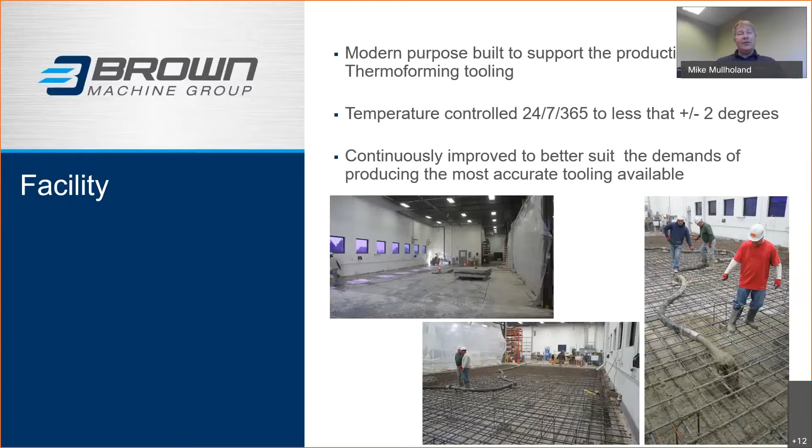And once they start to realize the benefits of us and our methodologies, our equipment, our facility, and the time we take and attention to detail, they start to get the benefit out of that tooling, and we see them after that being a constant customer with us and sending us all their trim tools. So it definitely makes a difference in the industry we're in, and we're going to continue that investment, and we'll talk about that a little bit later in the presentation with some equipment that we have coming.

Let's talk about our sales process next. So something we believe we do quite different than everyone else. We don't have, if you will, salespeople. We have project engineers. So the bulk of the people in that department either came out of our engineering group, our manufacturing group, or our processing group in terms of running equipment and things like that. So they all have a lot of knowledge that they bring to the table when customers send in a product for us to quote.

We're not just checking boxes and saying, okay, it's a stripper plate, it's a clamp plate, we'll send it in. We're looking at that product design and trying to understand what's going to be difficult to form, what's going to cause our customers headaches, what may be issues with that tooling that are going to be problematic down the road for them, bad punch to die conditions, stripping issues, things like this, or maybe even things that are going to drive the cost of the tooling up.

And we have those conversations up front at the time of quoting where we can kind of help guide customers into a better product design that's more manufacturable, it's easier to hold tolerances on the part in regard to things that may not make that difference in terms of the part itself. It can help reduce the cost of the tooling, or once again, make it easier to support, make it easier to manufacture because of what we can suggest along the way.

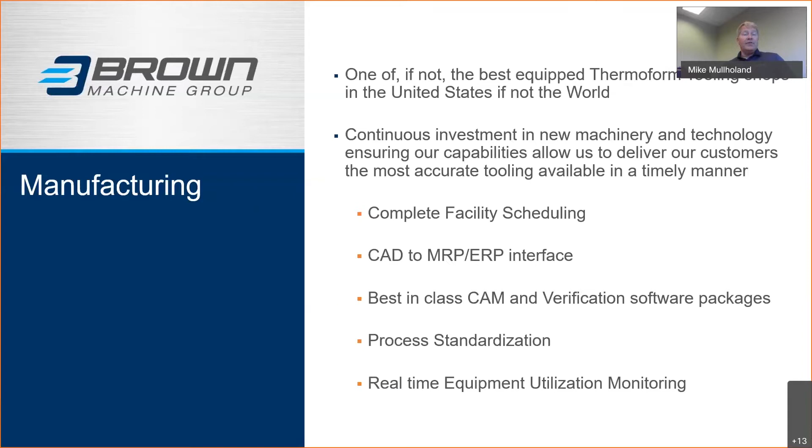All the vent drill holes are put in the machine, not by hand. We have control in making sure that those vent drills are there, they broke through, not missing. We don't have a broken drill bit somewhere. We laser check that drill when it's done for length or breakage. So if it would break, the machine will stop, pass that part out of it, flag that part. We know right where to look to understand where the issues might be. So once again, it improves quality, consistent quality, and accuracy of the parts, and not a lot of hand finishing.

The other thing it does, being able to 5-axis these parts on the back side, is the cooling circuit and the water and whatnot in them. We're able to push that water up very close to the cavity surface, up the sidewalls, up the top where you have a lot of material thickness also, and get the heat out of those parts very evenly and with a lot of water in cavities and things like that. So again, reduces cycle times, makes the tooling more efficient.

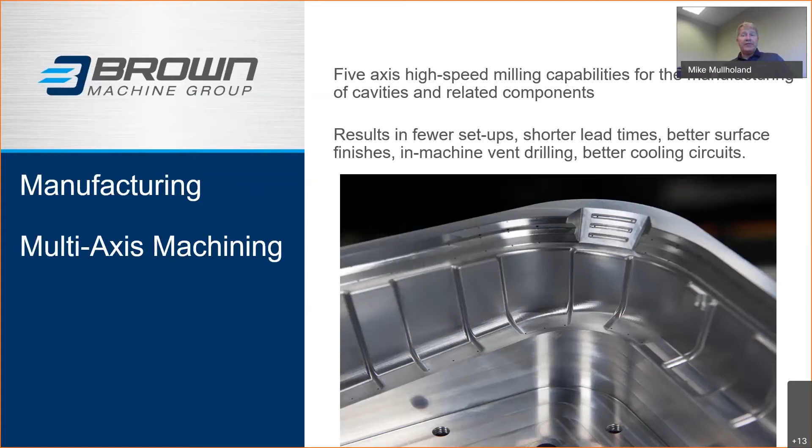Talk a little bit about automation. So we've got a lot of pallet changers, we've got FANUC robots, linear robots, a lot of things to use throughout the facility to automate processes, let us run lights out, make use of this equipment that we've bought, and as well not having a man stand there and just push buttons and watch for something to happen. We very often will have people running a multitude of machines where they're staying ahead of it, loading the pallet changer, loading the robot magazine and whatnot, and then they're on to running another machine.

Once again, keeps us cost competitive. Even though we have the best equipment out there, we run it, we get high utilization out of it. That keeps our costs under control, and as well allows us to deploy a lot of standardization in terms of the pallets, the mounting in between different machines and whatnot. It's driven that so that if one machine would be down, we can very easily move the pallet to another machine, pick it up and run it over there.

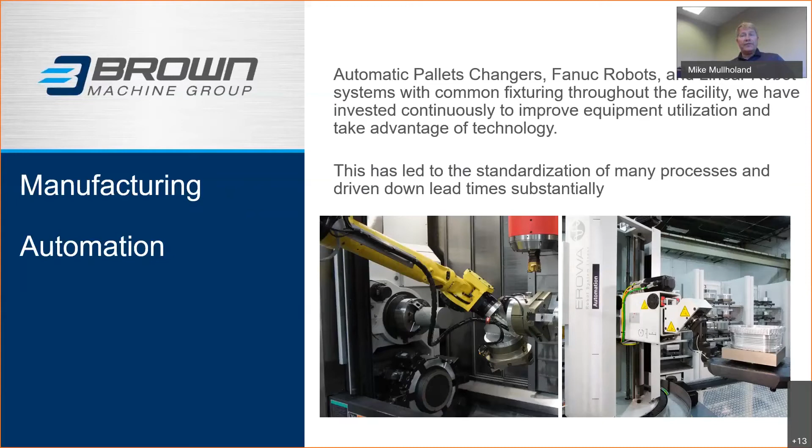Again, another picture of that robot. So once again, that robot would use that mainly for round componentry. So you take a cup cavity, for instance, and you take the round piece of billet. The robot would load that into that machine in the main spindle. The machine would mill, drill, tap, turn on the bottom of the cavity, let's say, transfer it to a sub spindle. The robot would put another piece in the main while that work was going on again in the main spindle.

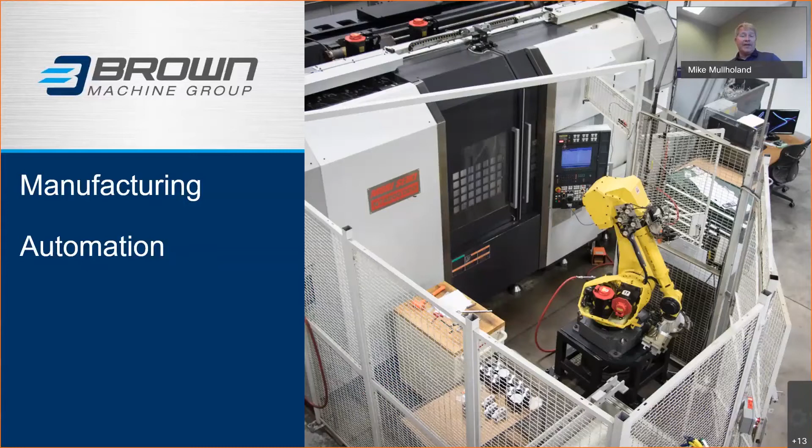In the sub spindle, that machine's also going to be cutting the cavitation, doing the vent drilling, doing any engraving. And the next time that robot interacts with the machine, it's going to take a completed part out, put it in the drawer untouched by a person. And we've essentially machined, if it was round, inside, outside, top, bottom. If it was non-round, we've done all 6 sides without a person even touching it.

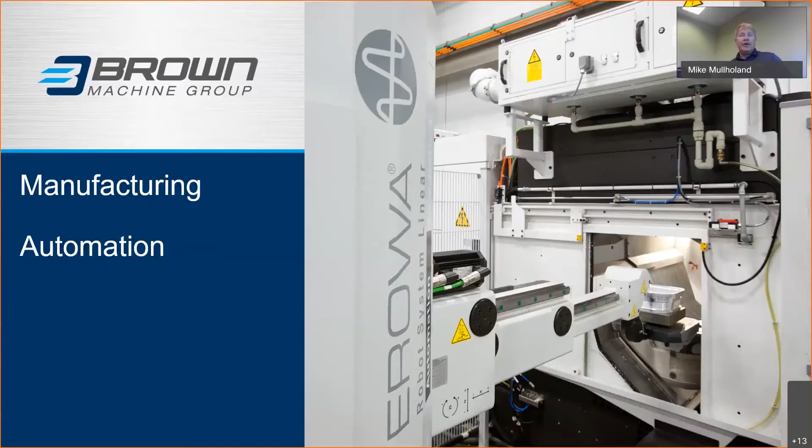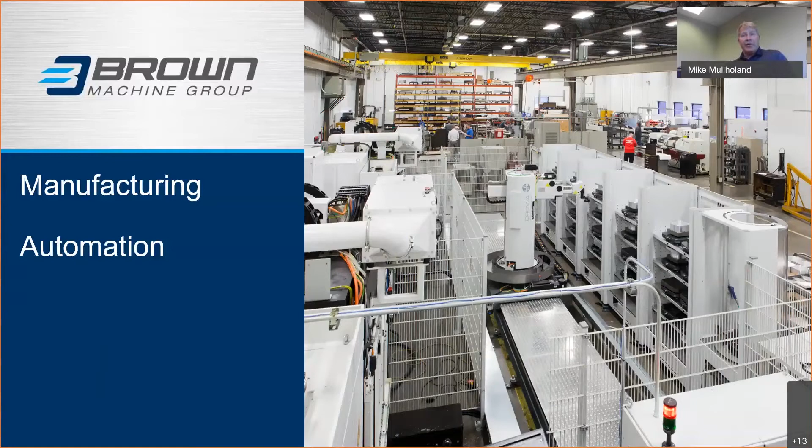Again, another picture of our linear robot loading up one of the milling machines. A wider view of that, so we have a 40 station stock station there, and in that we can have round parts, non-round parts, job A, B, C, D. Doesn't really matter, and we can run things out of sequence. We can run one to test things. If a customer wanted to get, let's just say, a cavity ahead of all the rest of them, that's not a problem. There's no additional charge for that because we've, again, designed around a lot of standardization.

It doesn't make any difference to that machine or the robot whether it takes, let's just say, a rectangular cavity out and runs it first. And before running the other 20 of them, it runs an egg-shaped cavity. So we can run one egg-shaped cavity, send it to a customer, or internally pull samples off of it, do some testing while we're in the midst of running other things.

So it gives us a lot of flexibility. Also gives our customers a lot of options in terms of if they want to see a part ahead of time or if we want to do just certain aspects of things before or after with no additional cost, once again, because of the standardization.

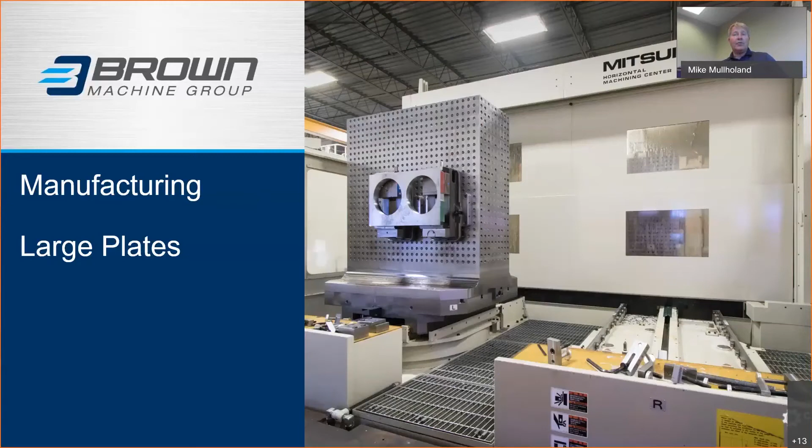Moving on from there, we'll go into some of the things that really set us apart. And that is our precision area, to which we have a jig grinder. So you see a picture of a very nice Hauser jig grinder, very specialized piece of equipment, very, very accurate, holds things down to 1/10,000th of an inch. So we fully contour, as you can see on the right-hand picture there, we would do dowel holes and trim contours for punches in this machine for the most part. So that machine, again, very, very accurate.

What that means to our customer is you'll see a lot of drawings come from other vendors, and tooling that we've repaired, reworked, redone, where they'll have a punch and die drawing that will just say maintain 2 to 4/10 punch to die clearance. If you've ever received anything from Brown, you'll see that the individual punch and die is toleranced with a specific size and a profile tolerance for the trim, as well as size and positional tolerance for the locating features, dowel holes, let's say. And the reason for that is we truly make those components to that print, to that accuracy level.

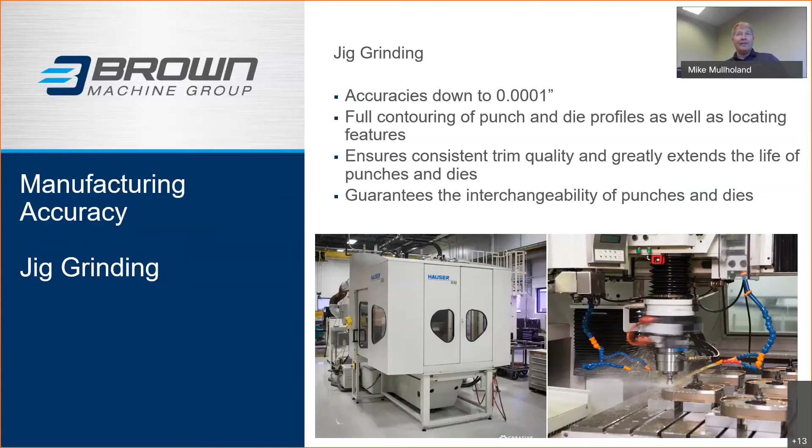Another machine that fits right into this same accuracy aspect is our jig borer. You're looking at a nice Yasda jig boring machine here. What we do on that machine is nothing but die shoes, die risers, mounting plates, things like that for the trim tool. So once again, a machine capable of tenth-type accuracies.

You can see the one die shoe pictured in the machine on the right. We're going to do any dowel hole locations, guide pin and bushing bores, or if there was punch to die round pilots and things like that. We're going to put those features in that die shoe after it's already been purchased, stress relieved, rough machined, allowed to sit again, stress relieved, and surface ground down to less than a thou, flat and parallel before it even enters into this machine.

But once again, this machine is going to make those locating and guiding features ultra accurate. So when we bolt those punches and dies that we made for you on top of them, the whole thing fits together, provides interchangeability, provides proper punch to die clearances, and gets you the absolute best conditions you can have for a good, long-lasting trim that holds its quality. And if you need to replace a part, you just take the old one off and bolt the other one on. We prove this day in and day out.

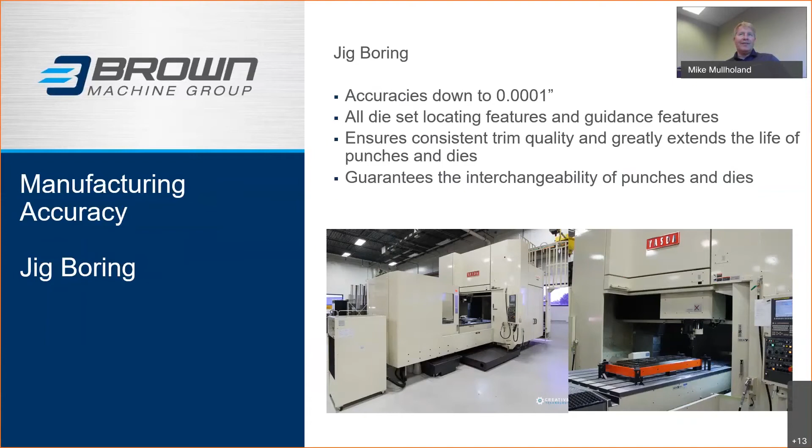The point I want to get across here is the attention we've given in terms of investment, methodologies, and equipment that we use to produce things to the accuracies we're talking about. When you see other competitors, they don't have machinery to this level, and they don't have a facility to this level. They're not producing parts at the same accuracies that we are. We've seen it, we can prove it. Anytime someone has parts or a die set, and says they're doing that, we welcome you to send it in. We're happy to CMM that and show you that it's not. And once again, that's usually the root of trimming problems and the longevity of the punches and dies.

I mentioned being able to check things like that, proof's in the pudding. We have two CMM machines that are sub-tenth accuracy capable. We can put full tools on them. There's some restrictions in terms of some of the sizes, but from a die set standpoint, we can fit full die sets on there, so we can check not only the shoes, but also punches and dies mounted on the shoes or separate. We can also check some mold components that don't exceed the limitations of the machine.

We can reverse engineer things here. Oftentimes customers get tool packages that they don't have prints with, and have us build a trim tool to go behind a mold that they have existing, or rework an existing trim tool when they don't have prints. We have the capability of reverse engineering and helping customers out with that process.

So the parts that run across this machine, anything we build that goes into the trim tool related to actual trimming - punch shoe, die shoe, scrap blades, punches, dies, pre-punches, pre-dies - all those components are 100% checked through our CMM equipment. We then have those inspection reports available to share with the customer and ship with the tooling, along with a 100% detailed as-built CAD package and print package for that tool.

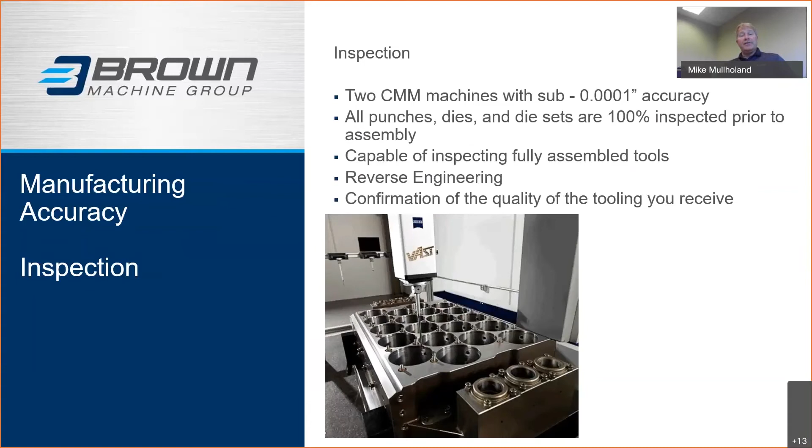If you have some plates or a tool that's much larger and have questions, and it won't fit in the CMM, sometimes we can pick it up with a couple different pickups and do it. Or we also have capabilities where we can put it in, say, our jig borer, and actually inspect things within that machine, which, as I reported here previously, is very, very accurate and has capabilities almost in terms of the accuracy of the CMM. So oftentimes, if we get pushed out of the CMM, we can check some things in the jig borer.

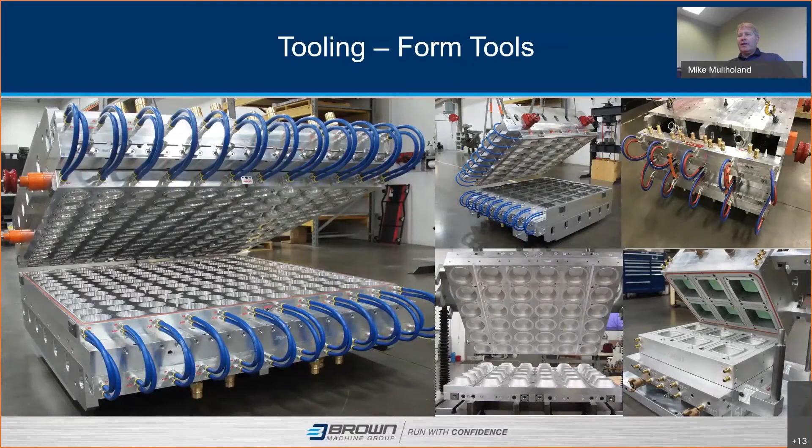Once again, mentioned tooling. So form tools - what we can do, as you see here, round tooling, non-round hinge containers, foam tooling. As I mentioned before, a lot of the European style, be it tilt molds, form trim in place, form trim stack. We're starting to get into form, fill, seal tooling. We do tooling for the paper industry - paper cups, paper plates, bowls, things like that. So we're really broadening our horizon, but again, all within this packaging industry.

We don't make parts for automotive. We don't make propellers. We don't make all kinds of other things. Our focus is on packaging tooling. That's what we've built the facility for. That's what we're experts for. That's what we bring to the table and make a difference in our customers' lives with - our ability to build packaging type tooling, mainly around thermoforming.

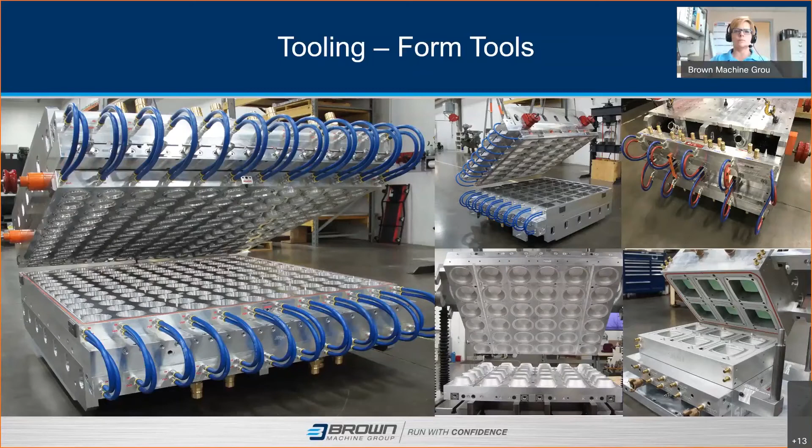So we've gotten quite a reputation in pre-punch tooling, be it for just piercing, be it for actually punching blanks, or we're also seeing a lot of this type of tooling coming into play for scoring and things like that, that will be used in tamper evidence. So we've built a pretty good reputation on that, and again, we stand behind everything we do.

So if there would be an issue, or if there are parts that, when we check things, if they're not to the tolerances, if they're not to the accuracy that they need to be, we will not ship something to you that's like that and just move it through. We will stop, we'll let you know, we'll remake those parts. Our reputation hangs on that limb right there, and we're going to make sure we get you something that's accurate that you're successful with. No arguments at all.

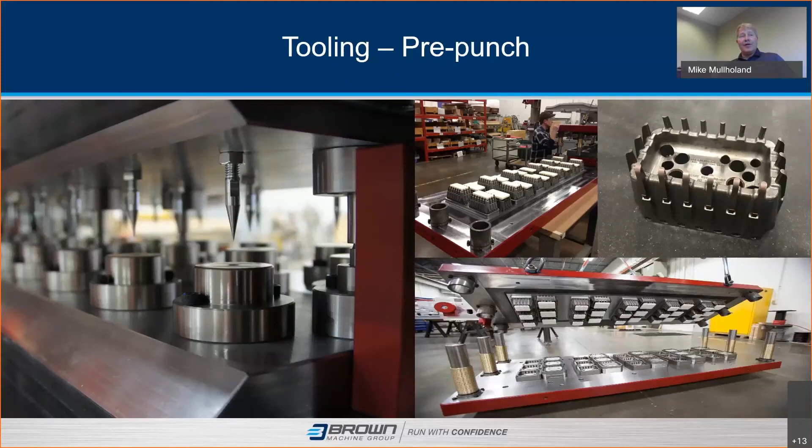Perimeter tooling - round, non-round cup tooling, bowl tooling, hinge container tooling, tamper evident hinge container tooling. We do it all. All these things require the same accuracies, the same tolerances that we live with day in and day out. We manage that with our jig grinding, jig boring, super accurate wire EDM machines and the processes we use, Studer ID-OD grinder - top line equipment, top line facility, and most importantly, people that make a difference and hold themselves to the Freeman level of quality.

So that's what we provide. That's what we've built our reputation on. We've seen our customers be successful based on that tooling that we're sending them. The biggest proof of that is they continue to come back and order it again and again from us, and send tooling they've bought from other people to us to help get it up to a Freeman standard.

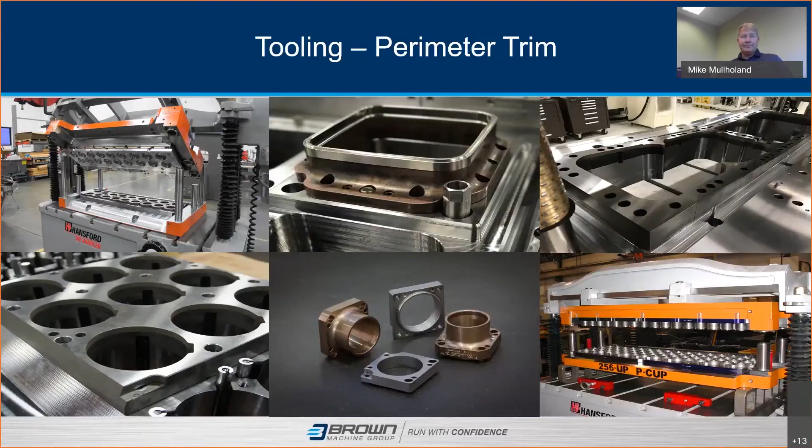Quite honestly, that's just not the case. We've built this tooling successfully. We've reverse engineered it, traveled to facilities and seen how it's built, and I can tell you they don't have equipment or facilities any better than what we have here. Our knowledge in terms of this tooling is very good, and we can help you if you have some of this type of tooling.

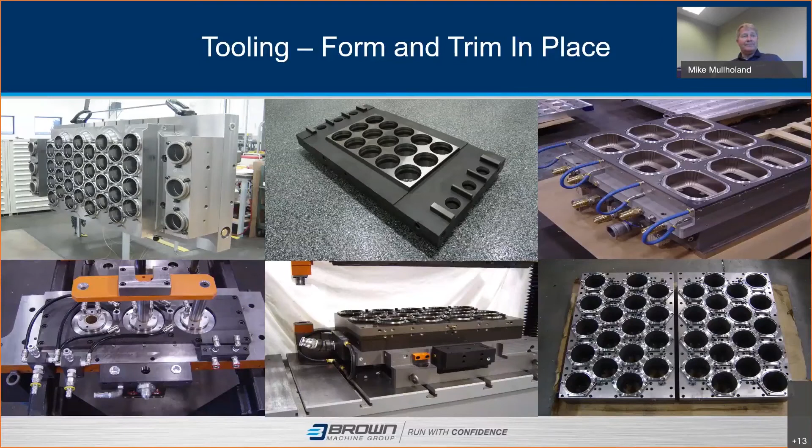Sharp edge type applications - this is kind of what we cut our teeth on. We still do it, we don't really go out and seek this type of work, but it's the type of tooling Freeman originally started on back in the 90s, whether solid machined or forged high type dies and hand sharpened dies, or a steel rule, floating steel rule die application. We have the knowledge, talent, and ability to build this type of stuff. If it complements the other work we're doing in form, post trim, sharp edge trim tooling, we'll build it for you, and we're very good at it.

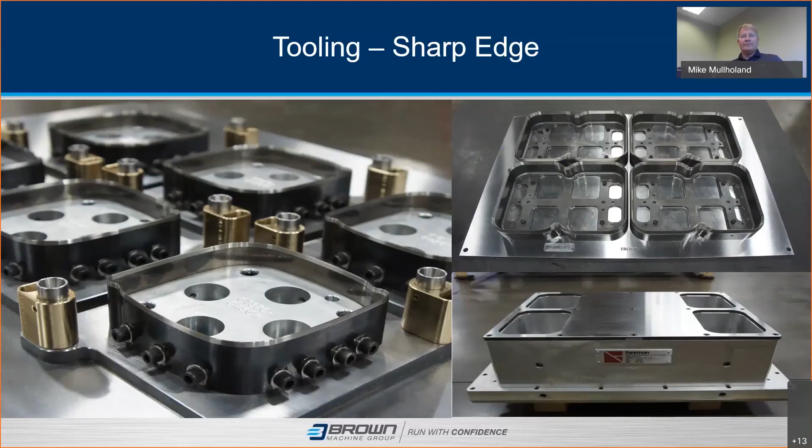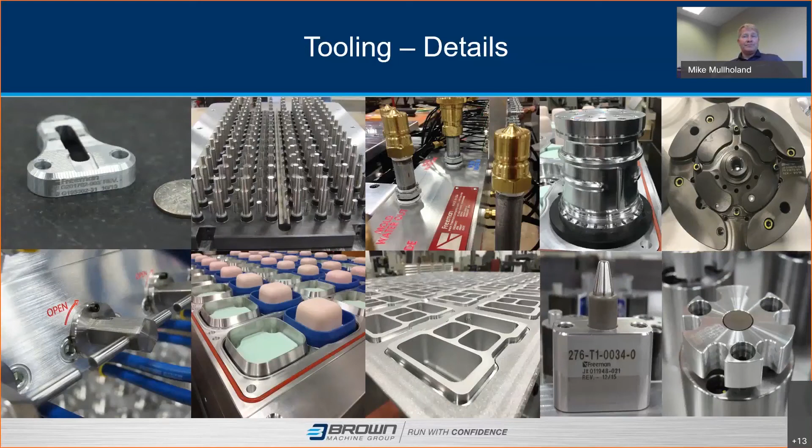Another thing to point out - our expertise here at Freeman is in making tooling. That's what we're experts at. We've gained the ability to rely on our brothers up at Brown and at NAS for processing expertise, machine information, machine details on the end of the thermoformers, and from NAS in terms of packaging, boxing, counting on the back end from automation.

One thing that's been a big item of interest for our customers here at Freeman - we have a small cut sheet former and sharp edge, one-up sharp edge type trim tool that we can do very small sample runs on, do some test cutting, things like that. But up at Brown in the lab, they have the capability to have a former and a sharp edge or match metal trim press, so if more of a test or sample run is required, we can work with them and the customers to get small production runs or larger sampling runs done.

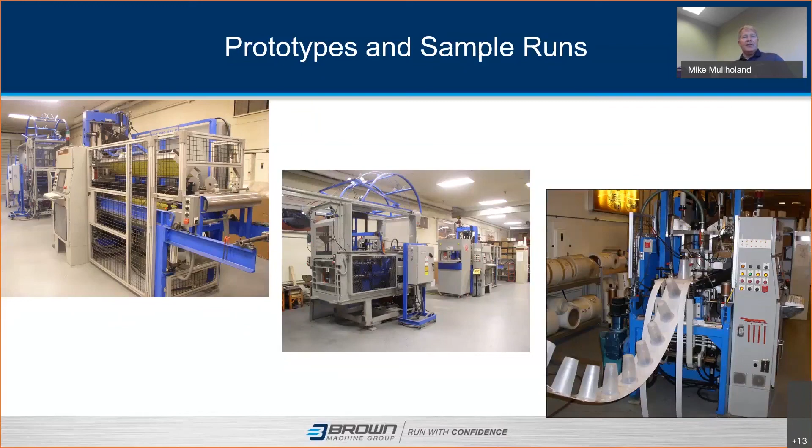A little bit more of a production-like environment up there opposed to a cut sheet former that we have here in Fremont. So once again, a really nice addition that we can bring as the Brown Machine Group to our customers.

At the end of the day, the most important thing we have here is our people. I'm proud to say we have a staff of people dedicated day in and day out to producing things the Freeman way of doing stuff: top quality, spare no expense, make sure it's the most accurate, because that's what's going to get customers to come back to us.

Once again, our investment in technology: robots, high-tech machines, equipment, lasers, all kinds of things here that we really want to get the youth interested in. I'm proud to say that the average age of our employee here at Freeman is about 37 years old, which says a lot to our dedication and commitment to educating and bringing people in here and keeping this going.